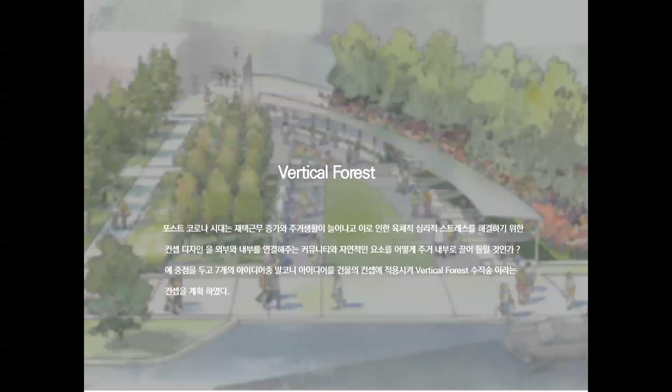The post-corona era plan uses the concept of a vertical forest by applying balcony ideas to the building concept, focusing on attracting natural elements and communities that connect the outside to the inside, to address increased telework and residential stress.

The site is located in Jueoldong, Namgu, Gwangju.

Nowon Energy Zero Housing Complex, Easy House, is the nation's first zero-energy housing complex, built for actual verification prior to the mandatory construction of zero energy buildings. Easy House produces 5 major energies: heating, cooling, hot water, ventilation and lighting that the entire complex needs. It is an Energy Zero house designed to supply 278% of estimated energy consumption through solar and geothermal heat.

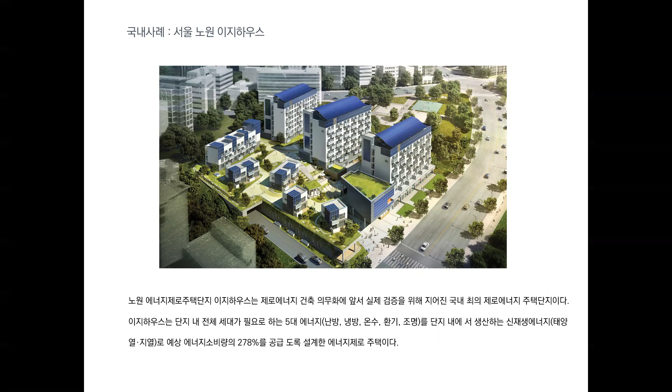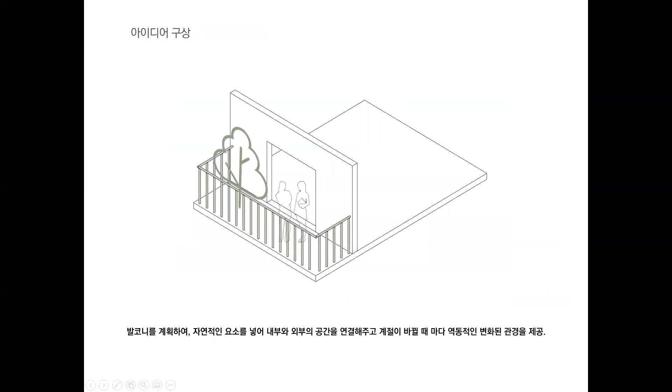The following are 7 eco-friendly technologies. The first idea is to plan a balcony, connecting the interior and exterior spaces with natural elements, and providing dynamically changing views as the seasons change.

The second idea is reinforced glass floors with various materials that let you feel natural elements such as grass, sand, gravel, and flowers, presenting an idea to solve psychological stress while performing tasks within the stuffy space of the house.

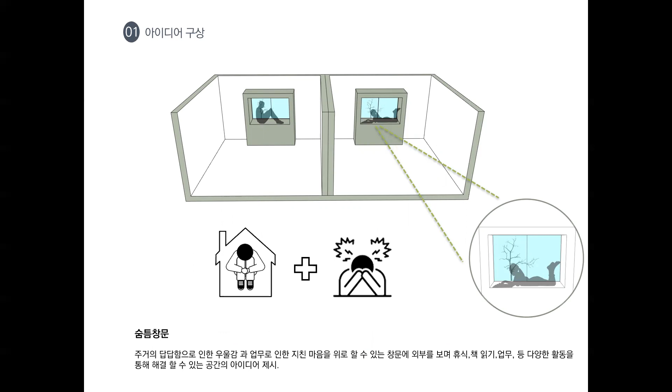The third idea is the window of breath, presenting a space that can be used for various activities such as relaxation, reading, and work, looking outside the window to comfort depression and tiredness caused by work.

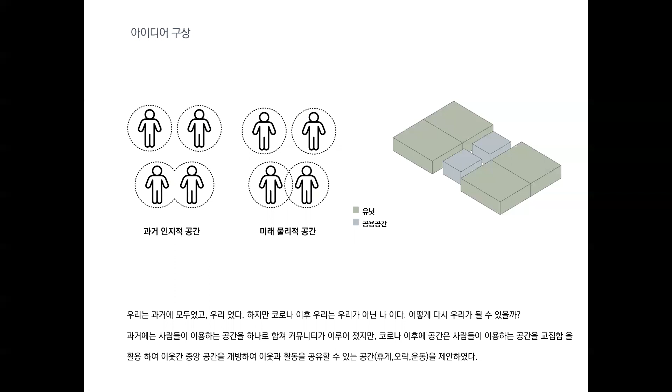The fifth idea is arbitrary distancing, designed to maintain social distancing by shaping a grid visible in the space where people's movements and community activities take place.

The sixth idea is to install a sink in front of the entrance porch, for virus prevention in line with post-corona life.

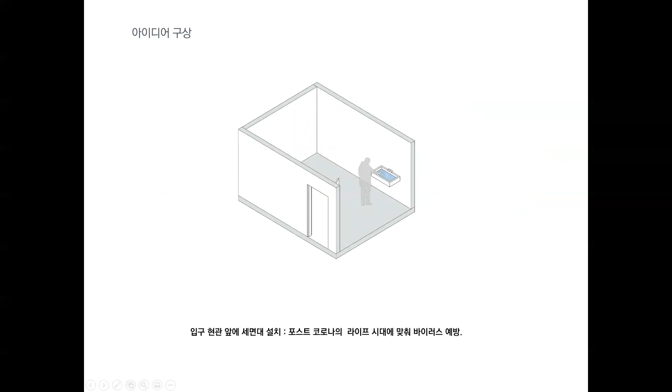The seventh idea was to plan a home-based, all-in-one telework space.

The mass process protrudes into the form of the site and produces a courtyard-type base for street activation, and the street activation divides the base platform into urban natural and human cultural axes. He then planned 7 residential clusters and massed them into plate-type and tower-type buildings.

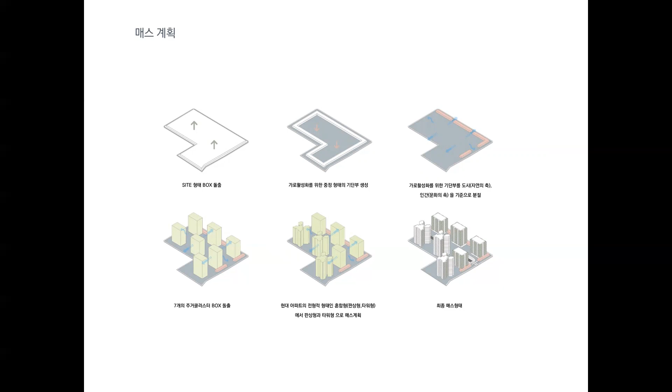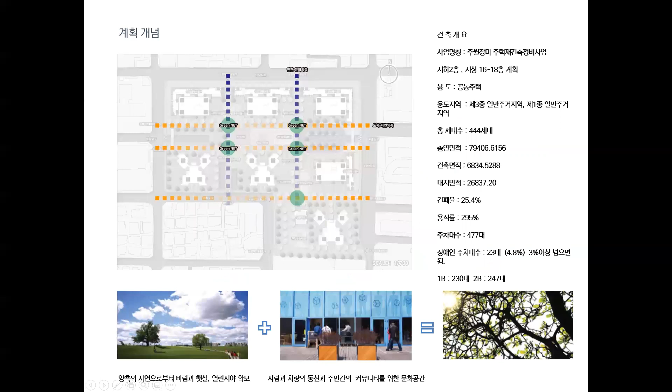In the community plan, piloti space was planned on the first floor to attract nature and to plan a space for gathering and contemplation.

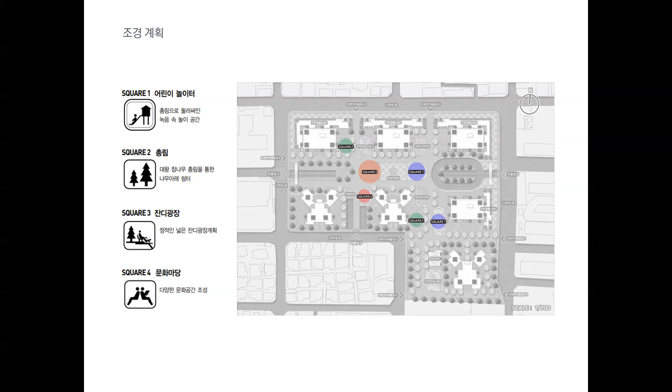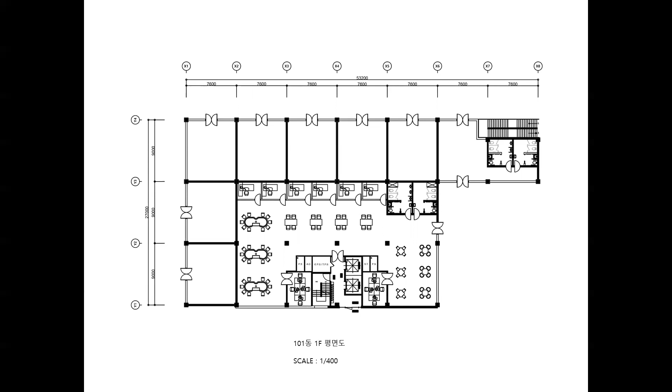A public office space was designed on the first floor of each tower. Next, a common workspace was designed on the first floor of the Rahmen structure. There are 477 underground parking spaces and 23 disabled parking spaces.

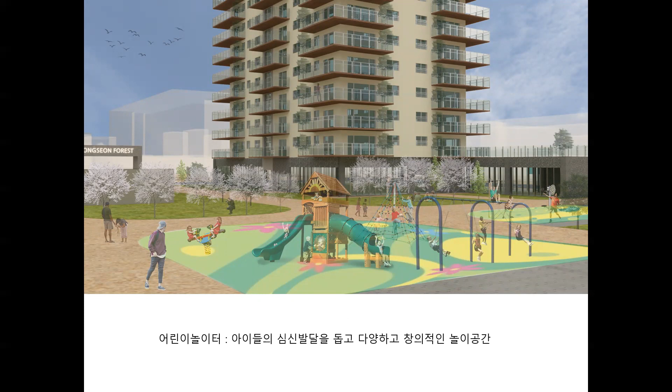Next is the perspective of a children's playground. It helps children develop their mind and body and is a diverse and creative playground.

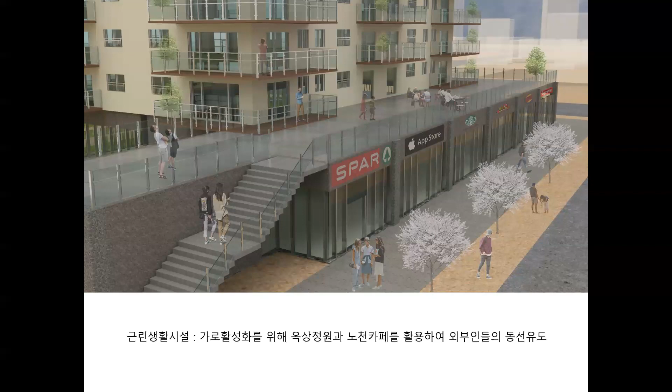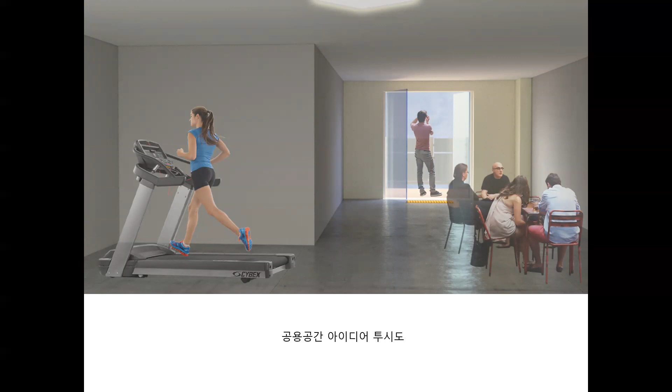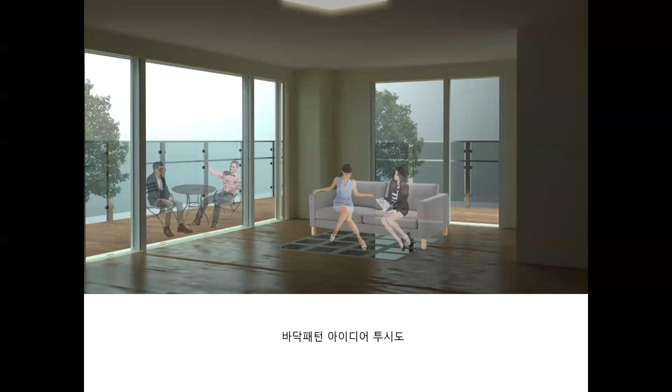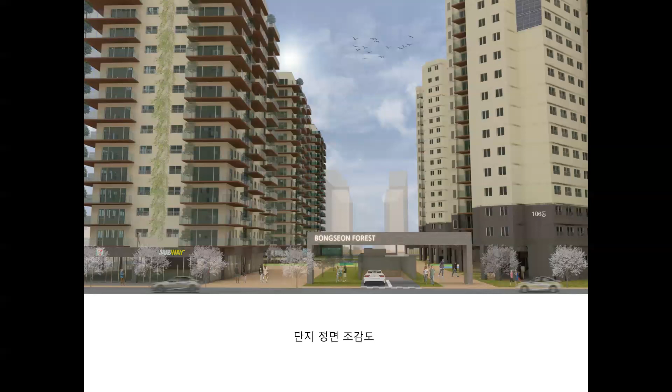Finally, the final model picture, and it is the result of the graduation work panel. With this, I'll end my presentation. Thank you.